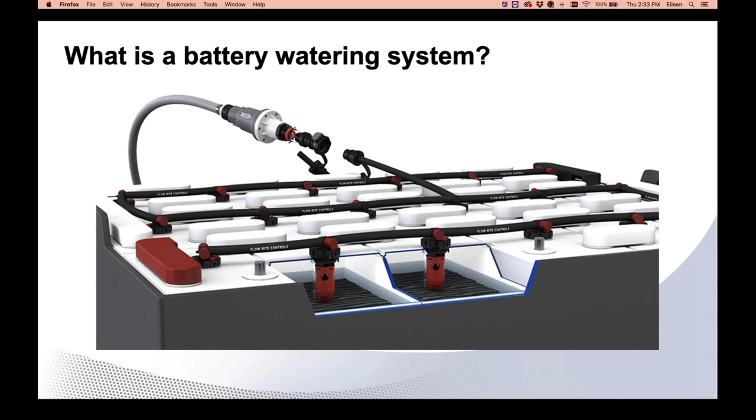We want to make sure that we are safe and due diligent in our work, and we want to answer a few questions like: how attentive are you to your water levels? How much time is wasted by manually watering each battery cell? And how about the safety of your employees? Our Flow-Rite SPS will assist in greatly decreasing the amount of time needed to water your batteries, as well as the safety and peace of mind knowing you have the correct amount of necessary water in each cell.

Now let's look at some reasons why single-point watering systems are so important and some benefits to you and your organization. There is the cost and labor savings. We can show you on our ROI tool an analysis calculating your labor savings. Other cost benefits include extended battery life, increased performance, and cleaner floors and equipment.

There's also the time savings. Snap-on, snap-off water connections and fast filling turn the often ignored task of watering batteries into a quick, simple task, allowing you to fill each battery in 30 seconds or less.

There's also improved battery life and performance. A properly watered battery lasts longer and performs better. Overfilling a battery results in loss of acid, while charging with low electrolyte levels results in permanent damage to the lead plates. Both will result in the loss of capacity and life expectancy of the battery.

And finally, we have increased safety. Fill batteries without having to remove the vent covers. Avoid battery acid burns, ruin clothing, and noxious fumes. They also prevent people from being exposed to sulfuric acid. Optional flame arresters also prevent the ignition of flammable battery cell gases, all in an effort for increased safety.

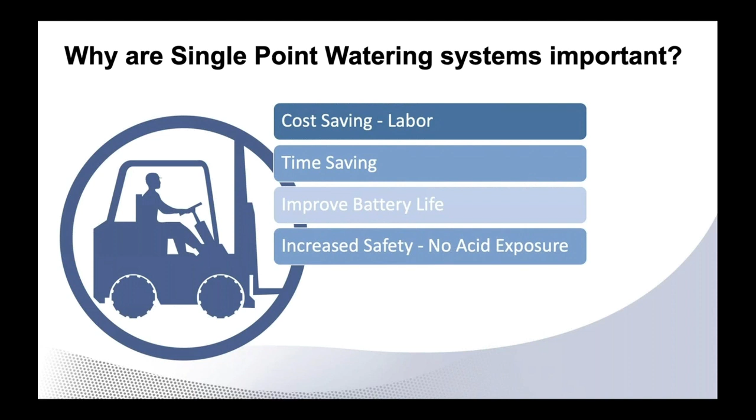As we talk about our Millennium Evo valves, it's good to talk about the applications they can be installed in. These include forklifts, powered pallet jacks, scrubbers, sweepers, and locomotives, and they are also used with solar energy. As we speak about our Millennium Evo, let me discuss some of the features of our valves.

Our valves operate on a pressure range of 3 to 35 psi. We have a 3-port swivel Tee. The swivel T rotates 360 degrees, making it easy to install and perform maintenance. It will also allow you to place the feed tube wherever you want. Some competitor components will have to be routed over the cables. Another plus is if the T is broken, you simply replace it, not the entire valve.

Our date code lets you know the day, month, year, and shift the valve was approved. This will be discussed in our warranty recap.

There is a color flip-top hydrometer port that matches the length of the valve. Our optical indicator lets you have an inside look into the valve to see if water is needed. Some of our competitors have a hinged apparatus that can lead to clogging or to get stuck in the open or closed position. We also have a protective shroud.

With our venting ports, as you know, moisture and gas can collect in the cell, and our raised vents provide more room inside the cell for fluid expansion. This is a huge plus for fast and opportunity charge, as there is more gas and moisture in that process.

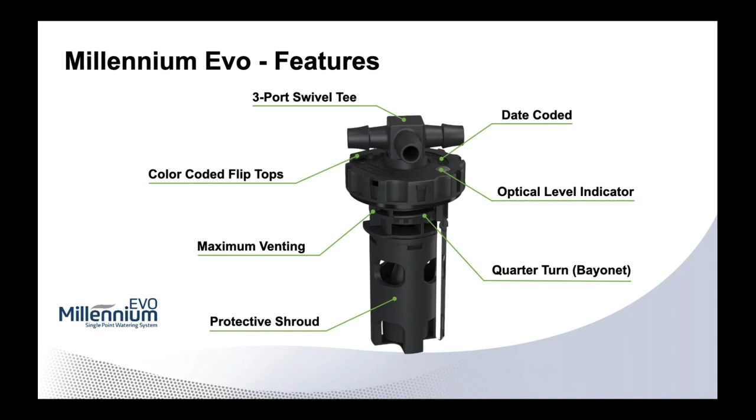Finding the correct valve is simple, as we have a few different ways to make sure you have the correct system. You may go to page 12 of our catalog to see a chart with the battery and corresponding valve. If you don't have a catalog, just let your sales rep know and we can ship those out to you.

Our short or yellow valve is our DeepCycle valve. Our standard black or orange valve works on the majority of the industrial batteries, but there are applications that do call for our longer red and white valves.

You can always go to our website and click on our kit builder to assist with proper valves and part numbers for their corresponding batteries.

In our pre-assembled kits, all tubing and valves are included. The tubing is already attached to the swivel tees and is in the proper layout requested, very similar to a harness. Simply insert the valves and attach the string to the valves.

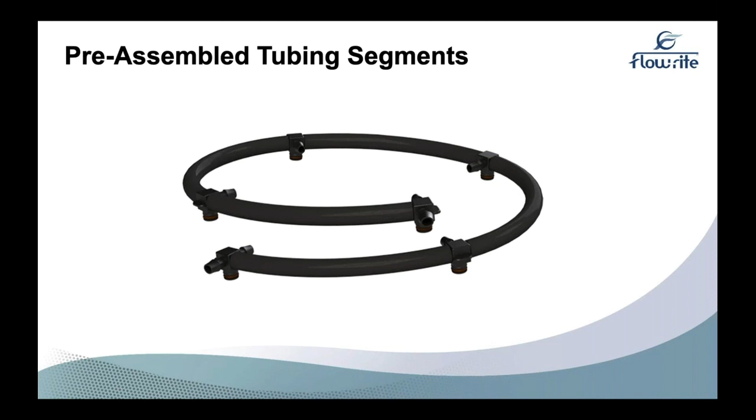In addition to our catalog and website, we also have a cell depth measuring tool. This is a tool that you insert in the cell, and it measures the depth and has a corresponding color to let you know the proper valve. This is extremely beneficial for older batteries or refurbished batteries where you can't tell the make and model.

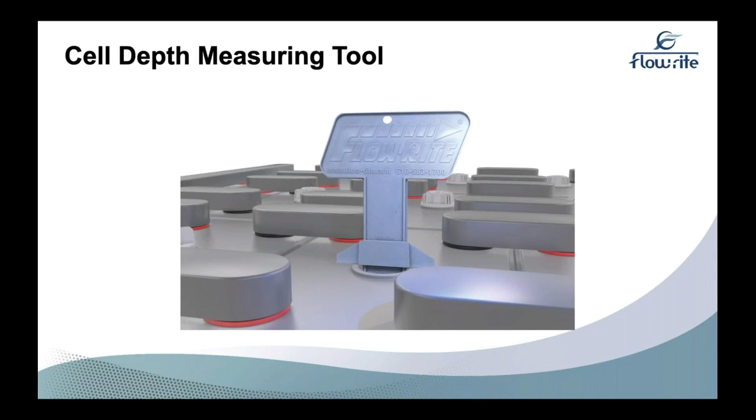In addition to our Millennium Evo system, we also offer our WaterWise system. This is a flip-top option that works best in smaller fleets or in times when the customer doesn't want to fully invest in a single-point watering system.

It has our recombinant tips that promote and direct condensation back into the cell, which reduces water consumption. It is also acid resistant due to the polypropylene construction. There is also a depth limiter. This limits the watering gun depth and assures proper watering level every time. There are 2 different lengths and part numbers that can also be provided.

Now that we've discussed our Millennium Evo and WaterWise options, I'm going to hand the presentation over to Todd Cowan and let him discuss our DeepCycle applications.

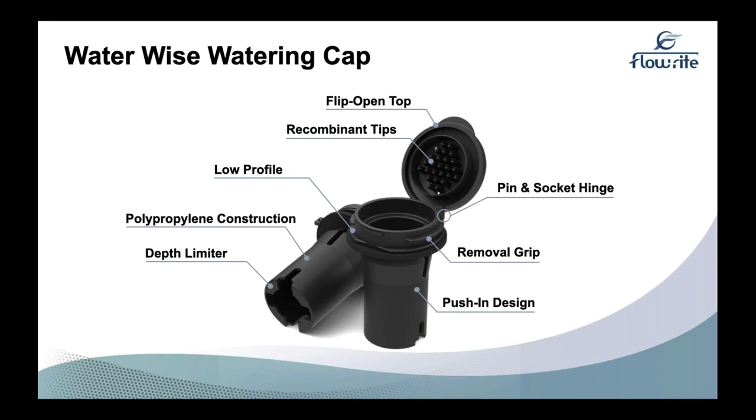Thank you, Rob. This is Todd Cowan, Flow-Rite's Business Development Manager for DeepCycle. I'm going to talk to you a little bit about Pro-Fill single-point watering for use with DeepCycle flooded lead-acid batteries.

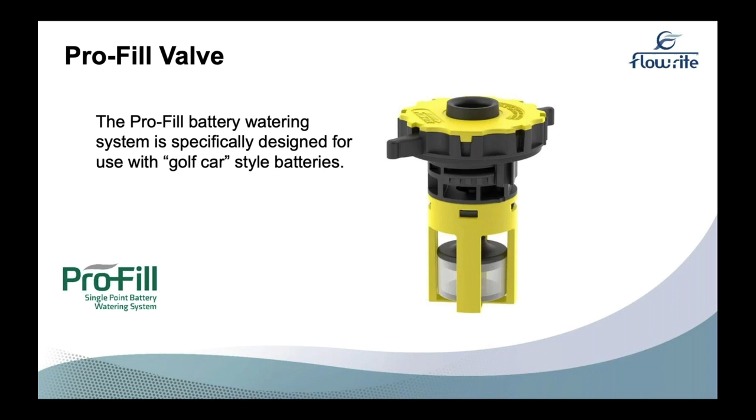Flow-Rite's Pro-Fill onboard battery watering system is the only system that has been specifically designed for golf car or utility vehicle application. These applications include, but are not limited to, RV, aerial work platforms, standby power, floor scrubbers, scissor lifts, golf cars, and other electric vehicles.

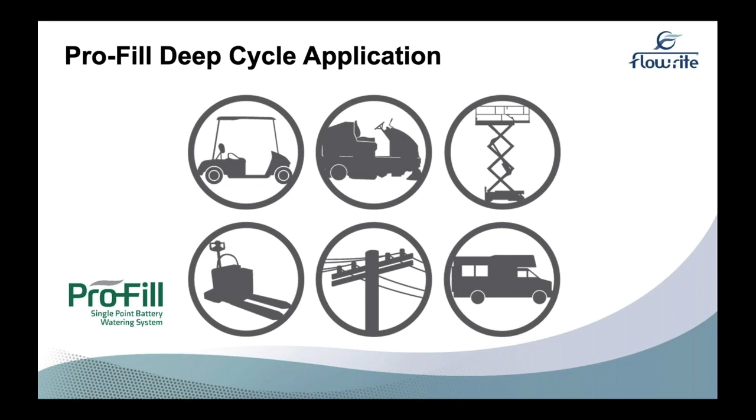Our flame arrestor inside each valve makes ProFill the safest battery watering system on the planet. Approved by major battery manufacturers, ProFill has this built-in safety feature that is necessary for all applications such as golf car, utility vehicles, sweeper scrubbers, pallet jacks, or anywhere that batteries are used in an enclosed space or otherwise potentially dangerous environments.

Next, I'd like to point out the patented manifold. Our manifold provides the quickest and easiest installation of systems and also aids in the even distribution of water to the single-point watering system and valves.

Next, I'd like to point out the winged valve feature. These wings make installation quicker and easier.

If you use this system with our pre-cut tubing or snake tubing, you will literally need no tools for installation.

Next, I'd like to point out the 3-port swivel. This is shared with the Millennium line. As we've talked about, the 3-port swivel rotates 360 degrees, allowing the most versatile installation. No worries about kink tube or if you need extra plumbing or fittings.

Next, I'd like to point out the protective shroud. This is also shared on the Millennium line. This shroud protects the internal displacer from damage due to potential plate growth in an older battery, and also protects the valve during installation, shipping, or any other time it's handled.

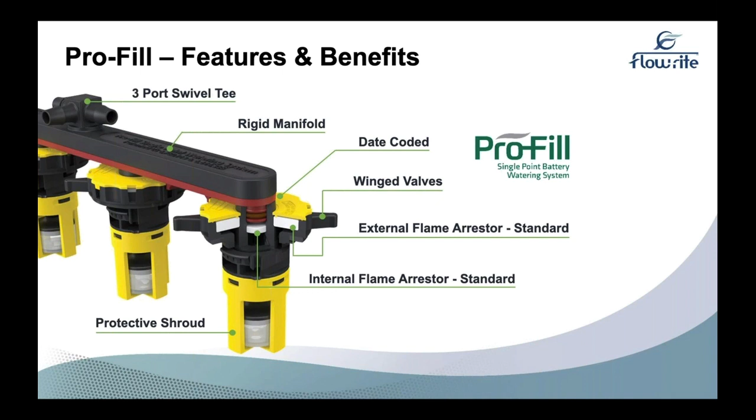Finally, I'd like to discuss the date code. This date code is the born-on date, if you will, for the warranty. After each valve passes our automated test bench, this date code gets laser etched on and is there for the life of the valve. All of these features are acid resistant, just like all of our components, made of high quality polypropylene. This means these materials withstand the acid, temperature, and impact often seen in these types of applications. Next, I would like to discuss Flow-Rite's Pro-Fill snake tubing.

Snake tubing is an advantage that we give our partners for use with Pro-Fill systems. Snake tubing can be custom molded to fit specific vehicle and battery layouts, providing fast installation and lifelong success with the single point watering system. Snakes can be customized for each individual application and eliminate the need for cutting tubing or sizing tubing or fittings. Snake is made of polypropylene, is acid resistant, and is good for the life of the batteries.

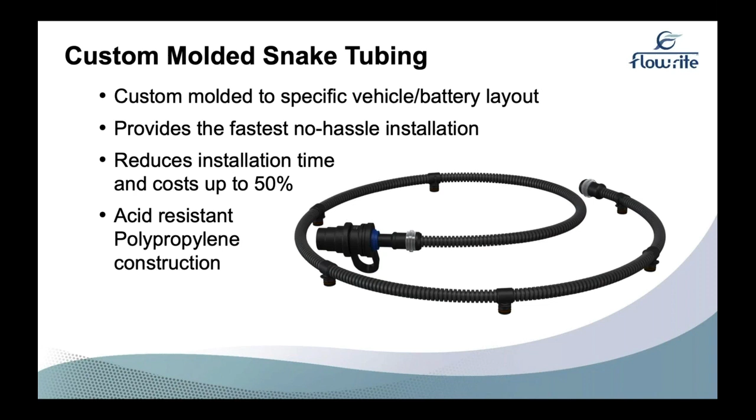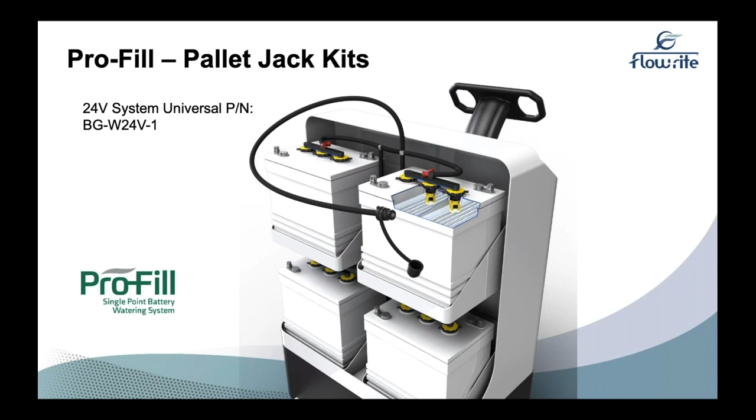Today I'll be covering the various water supplies available to help power the Flow-Rite watering systems, as well as what to look for in terms of system requirements and how to qualify a water supply. Lastly, I'd like to take a moment to review our sensor suite of level lights.

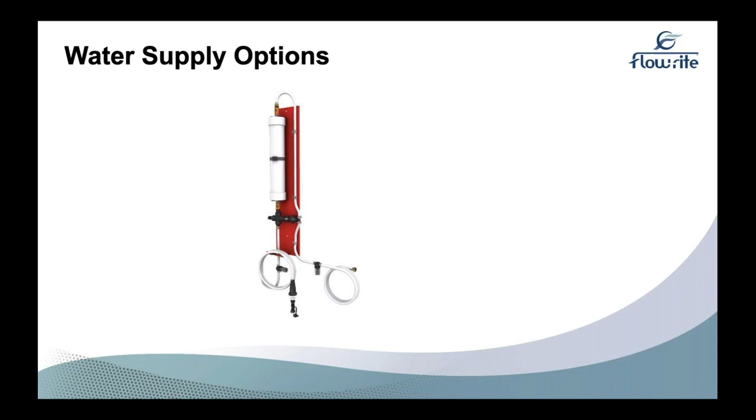I won't do a deep dive here into the importance of water quality, but I would like to mention that we don't recommend putting water with more than 100 parts per million of total dissolved solids into your battery. If you'd like to learn more about the importance of water quality, please reach out to your Flow-Rite rep or refer to the manufacturing guide of your battery.

I'd like to conclude this segment by mentioning that all of the water supplies on your screen now are engineered to provide the correct amounts of pressure and flow that our watering systems need to be successful. I'll cover more on that later.

I mentioned system requirements earlier, and now I'd like to take a moment to emphasize the importance of pressure and flow. Based on the fluidic nature of our valves, it's important for your Flow-Rite water supply to maintain a constant 3 to 35 psi for the watering systems to function as designed. Luckily, this is easily achieved and easy to test for using a simple method that I'll be talking about in the next slide.

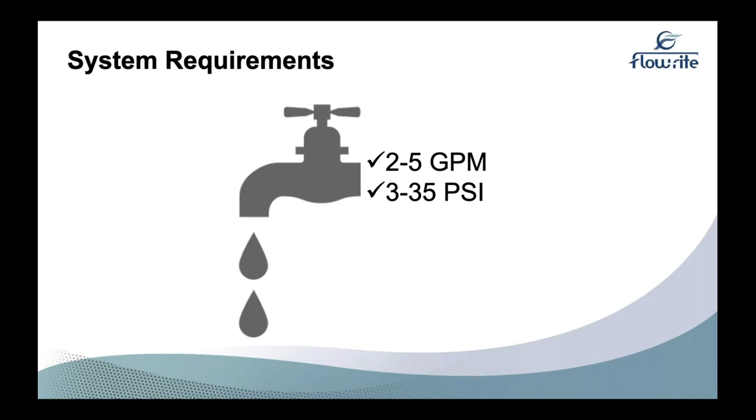To qualify a water supply, or to confirm that your incoming water source is adequate for using a Flow-Rite water supply, you can perform what we like to call a bucket test.

The bucket test is a highly scientific and technical method of collecting water into a 5-gallon bucket for 1 minute. As mentioned, the Flow-Rite watering system requires 3 to 35 psi to function as designed, which translates into 2 to 5 gallons of flow per minute. So to qualify a water supply without any tools, you simply purge water into a 5-gallon bucket for 1 minute. As long as the bucket has 2 to 5 gallons of water in it, we can confidently assume we're achieving the correct pressure and flow to be successful.

In the spirit of understanding your application and confirming we have a system for all environments, I'd like to confirm that our systems are safe to use in freezers and cold storage facilities. My only recommendations are: one, don't water in the freezer, and two, store your feed tube with the male coupler on it as horizontally as possible and on top of the battery. This helps keep residual water from collecting in the coupler and causing damage as it freezes.

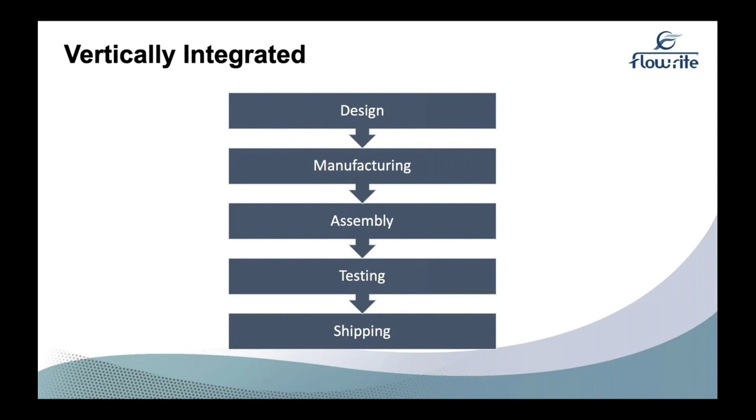Flow-Rite is a vertically integrated company, including doing our own captive injection molding. This means from the design of our products to manufacturing, assembling, testing, packaging, and shipping, we have complete control.

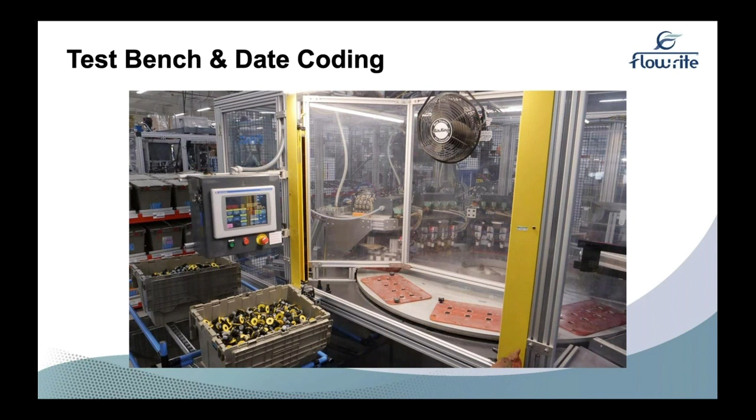Every valve we make is tested before it is sent to the customer. There are 4 different automated tests completed. Tests include a leak test at high pressure, as well as a drip test to ensure dripping does not occur during low pressure. If a valve does not pass the test, it is dropped into a red bin and considered rejected. Approved valves continue on the conveyor system. After passing, they are engraved with the date code, mentioned earlier in the presentation, on the cap of the valve.

Flow-Rite valves and kits are warranted up to 5 years from the date code. All water supply and level sensors are warranted up to 1 year. For any warranty claims, please contact your sales rep or our customer service team, who will issue an RGA number for the claim. We do ask that valves be returned to our quality lab for testing. Flow-Rite does this to ensure we are offering the best quality product we can.